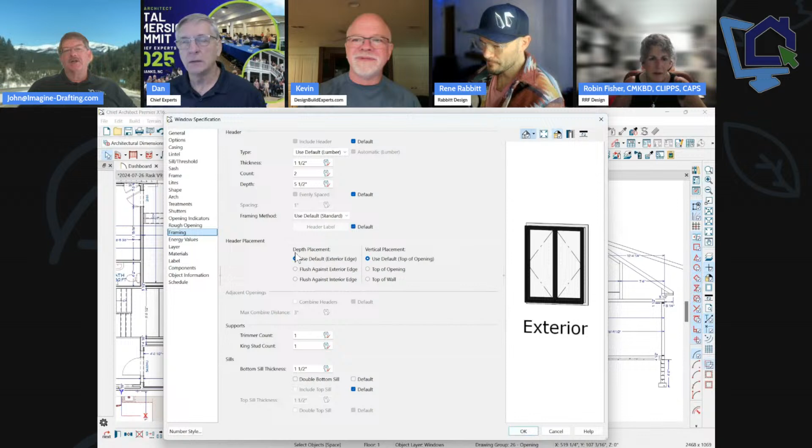So again, click on the window, then open it. No, wait, they're talking about the bottom of the wall, not the sill plate. Well, excuse me.

You'd have to just do a CAD drawing, right? If it were me, I would actually do it manually with a furring wall.

What would be the purpose of that? What's the use case of having that situation? Yeah, that would be a good question. That was Designer X asked that question. Designer X, what's the use case for that?

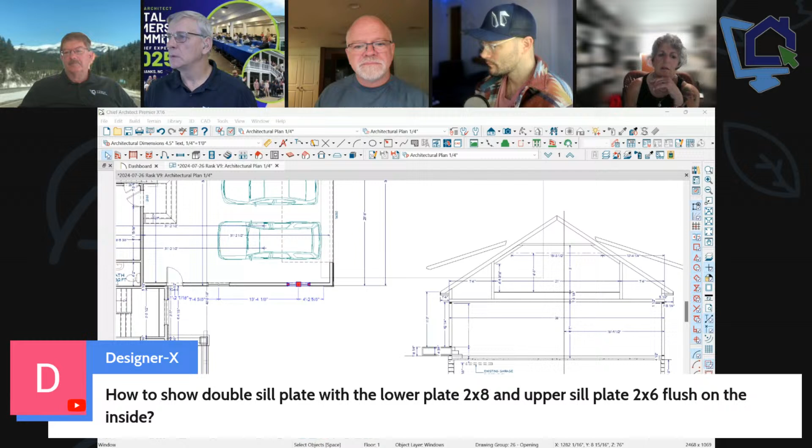Yeah, again, I just handle this with the detail, with a CAD line. You just have to create your wall so that it takes up the space. This is why I only do details for sections, because it burns so much time. When you're doing sections in Chief through a 3D model and you want to show that, you'd have to add that detail to the wall itself.

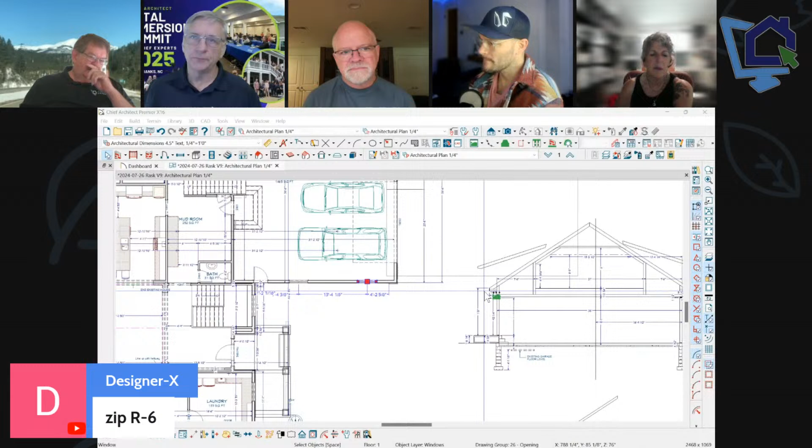Okay, explain to me what zip R6 is. I know R6 has got to be insulation, but what's a zip? That's a zip wall, zip sheathing. What's the R6 for? It's the R-value of our foam. You can buy zip panels now with insulation already attached to them. So a zip panel that is an R6.

He's looking to do a sill plate on the bottom. Well, let me just show you a way to do that, possibly. Could do a pony wall. Yeah, pony wall, that's what I'm thinking.

If you just want to show that in your framing, you just click on a wall, open its dialog, and here's if I wanted to show it in 3D, here's how I would do it, possibly. I'm going to draw a line through here, and I'm going to trim out my studs here. Okay, I'm going to add another plate.

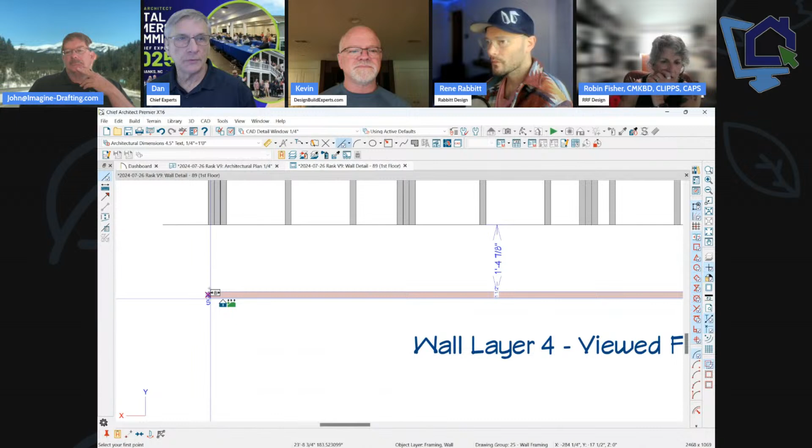Copy. Oops, I missed my snap there. Again, this is the long way around, it's one wall at a time. You could click that bottom wall then and make it a 2x8.

Okay, just by changing it. And then I'm just going to extend my stud, delete that line and extend my studs back down. So it's a way to do it.

It's manual, it's not super easy. I'll set up a way to do this, and I could show it in a little bit if you want to.

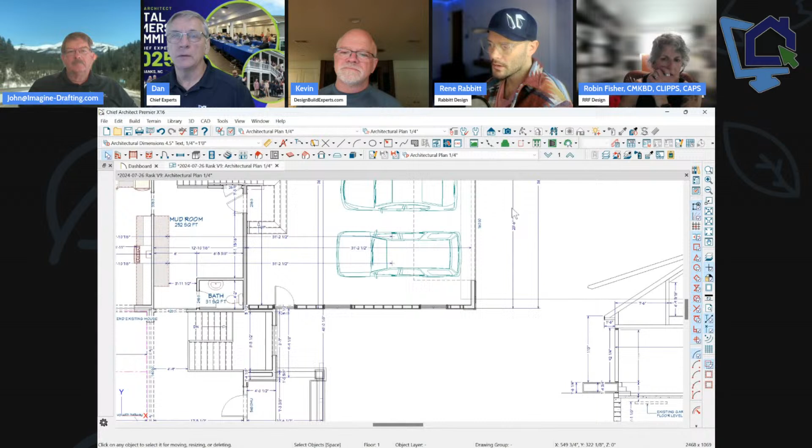But let's see if it worked. Yeah, so there's my plate. My plate's centered on the thing, so I would need to adjust that. I need to do the X, Y one way or the other. Once I calculate that, it wouldn't be hard to do, and I would have to move it over half of the distance of the plate.

I'm assuming you're wanting to do the plate like that because you want your zip panel with the sheathing to rest on the 2x8 and then nail at the bottom here. That's what I'm assuming. His last comment defines that, and that is correct, he wants the zip to sit on that plate. So that would be a way to do it so that it would be part of your cross section when you add that to your sections through your model.

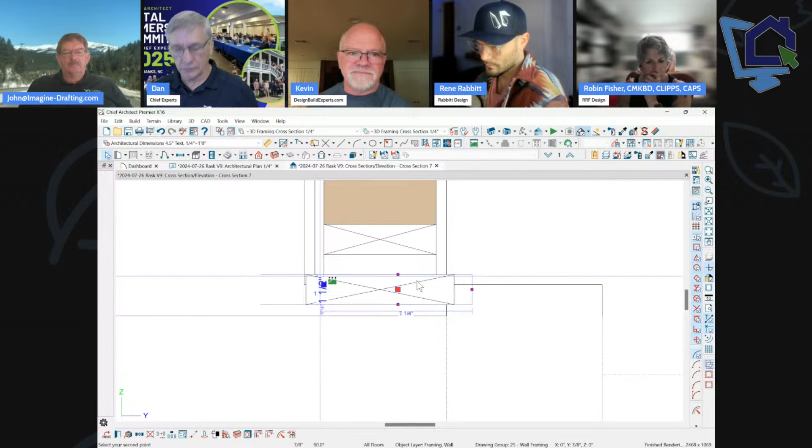So I got it here, right. I could probably move it right here too. The nice thing about... I'll do it the other way, like this. There you go. So now that's going to be sticking on the right side, and your sheathing would rest on top of that.

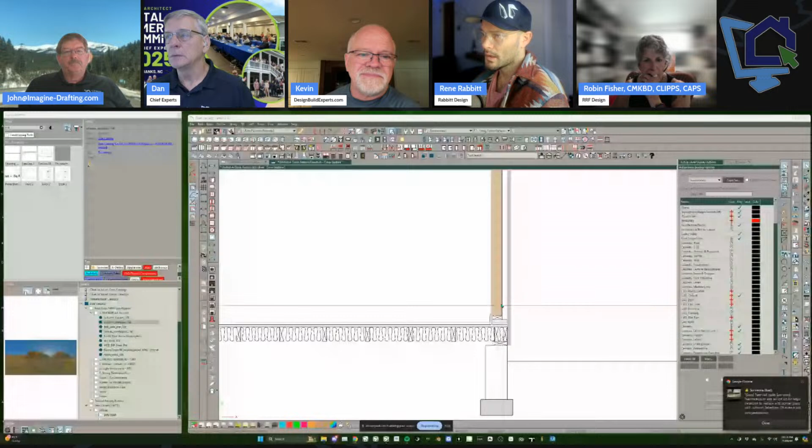Show us what your solution would be. I just have a pony wall here, and you've got to get rid of the little insulation cross box because it's going to show that this is insulated. But the pony wall is only 1.5 inches tall, so all I did was add that 2 inches, assuming 2 inches of zip wall, plus whatever this pony wall is. Now it didn't auto-create a cross box, that might be because I didn't get it right on the money, but the model is actually built this way now.

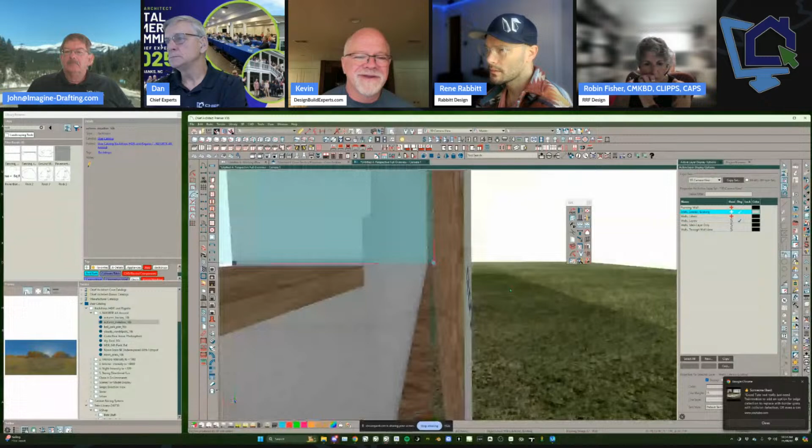There you go, so show a 3D view of what the pony wall looks like. Just show people how you made the pony wall for those that don't know how to do pony walls. So that's over one of these, I'm not sure which one I did it on.

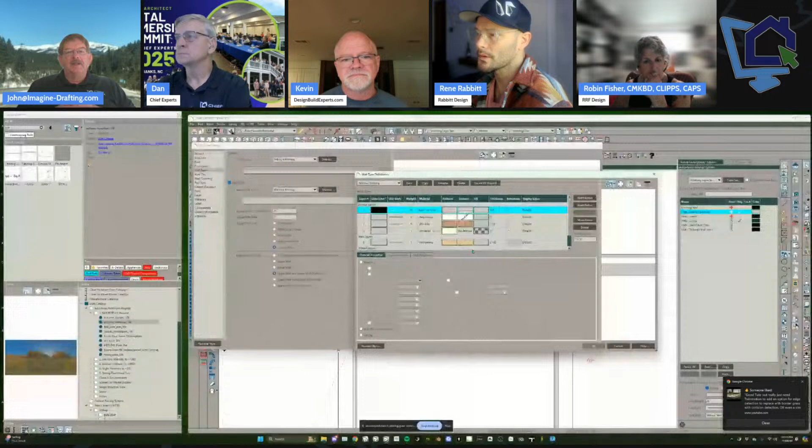So I opened up a wall, and in the wall types panel, designated it as a pony wall, and then went in to define my upper wall. I redefined the upper wall and dropped in a 2-inch insulation air gap. Make that wall a frame, that's the zip wall. And then the wall below it is 2 inches wider, that's the 2x6. So that's a 2x6 wall plus a 2x4 wall on top with that zip sheathing, and they are the same thickness, so they will align.

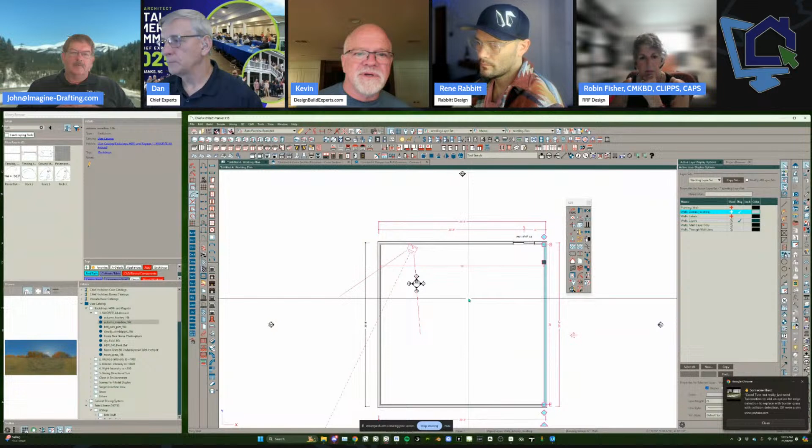So I just made it 1.5 inches tall. I have another way that also makes use of a pony wall, but you could also simply make a pony wall where the bottom part of the wall was only 1.5 inches tall. Make your wall 8 inches wide, make the upper portion of the pony wall 8 inches wide, and the zip is the exterior layer of that. So you've created an 8-inch wide wall with the zip sitting on top of an 8-inch wide wall that is only 1.5 inches tall. That's what I did.

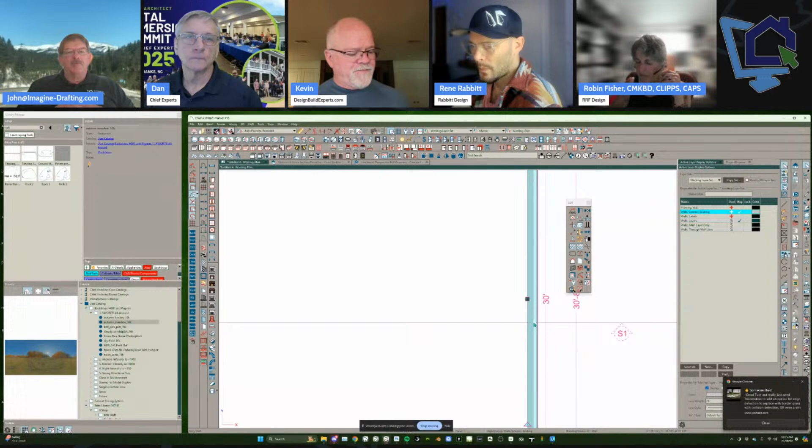Same thing, except that they're all pony walls that way. Now that you have that wall built, Rene, put it in your library and pull it from the library to draw it instead of from the wall tool.

Done. You call it the zip R6 wall. Does that only save the top wall, or does it save the bottom too? So you still have to designate a pony wall? Oh no, you're right, it does come in as the whole thing. Saves the whole thing, saves the whole thing. All right, cool, there you go, look at that.

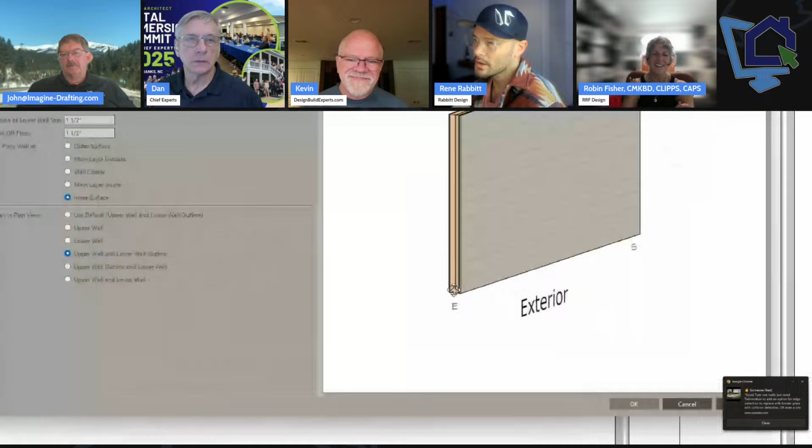You guys are amazing. It even shows it in this little preview, right? That's worth at least... how much is that worth? Man, that's worth a lot. You need to get those tricks at the summit.

I have a question about this zip sheathing, let me show my screen here. So again, these panels are now coming where you can get it with the insulation attached to the zip sheet. The zip sheathing is the coated OSB that's got the air barrier on it already, and then they have different thicknesses of the insulation.

I'd love to know how that compares in cost to put that on versus just, because I have a client that's asking for 2x4 framing with the R6 zip. I understand the benefits of the zip panel, that a lot of times you get through the stud, you'll get thermal bridging and cold transfer, and this breaks that. So I get the benefits of it, I'm just curious how the cost would compare. So if you think about it, can you comment, who's it, Design Build Experts?

That would be a really good breakdown of cost in the Discord server about that. Let me see if I can find it.

I can tell you that from my standpoint, when I was building, the zip was nearly equivalent to the cost when you consider everything, not just the price of the material, because of the labor and effort to put up the air barrier and insulation layers versus just putting up the zip. The place where it really shines is that you can put it up like anything else, seal the joints, and you have a completely sealed exterior, as well as not dealing with the wind blowing and pulling off your air barrier. So when you consider everything, it's easily worth it.

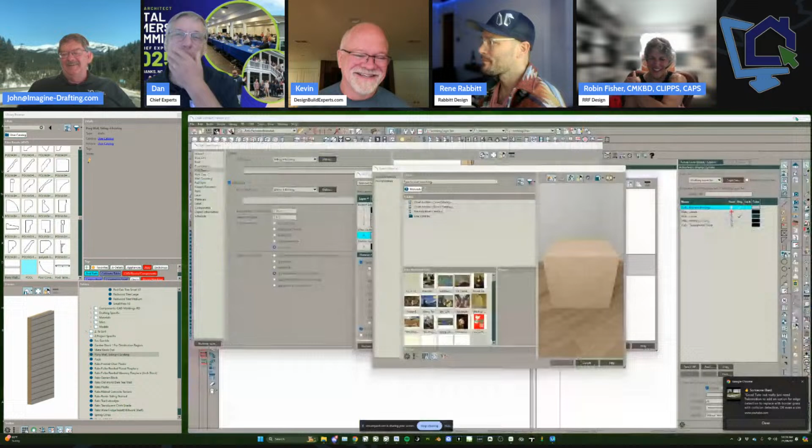This is a compliment and a dig at the same time, I think, Norman. So thank you, Norman. Yes, I agree with you, Norman. I wish we were metric too, much easier. So you've got an advocate here. They won't do much good.

Okay, cool, that was really a cool topic. I like that. I looked up some pricing on those sheets the other day. How much does a sheet cost? That's what I would like to know. I'd have to look at the R6 on it. I found some price like $90 a sheet, something like that.

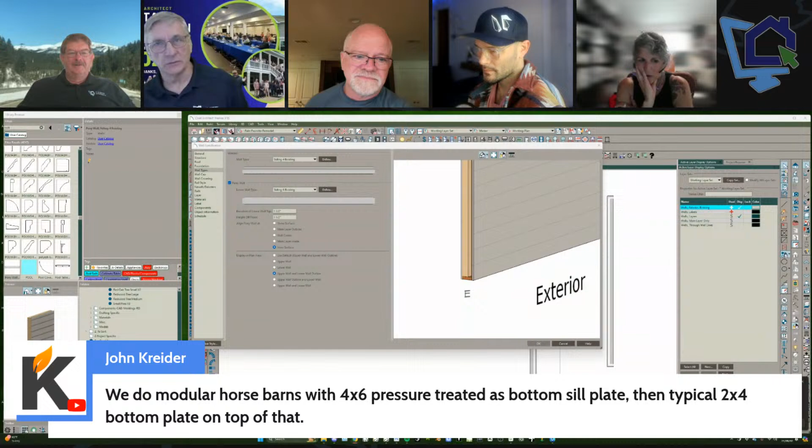Wow, that seemed like a little. But you have to compare that to the sheet of insulation, the sheet of OSB, the sheet of air barrier, everything total. I was comparing it to 2x4 insulation with the zip and the foam versus just 2x6 with OSB, that's kind of how I was looking at it. I understand what you're saying, but then you have the labor of installing each one of those things independently.

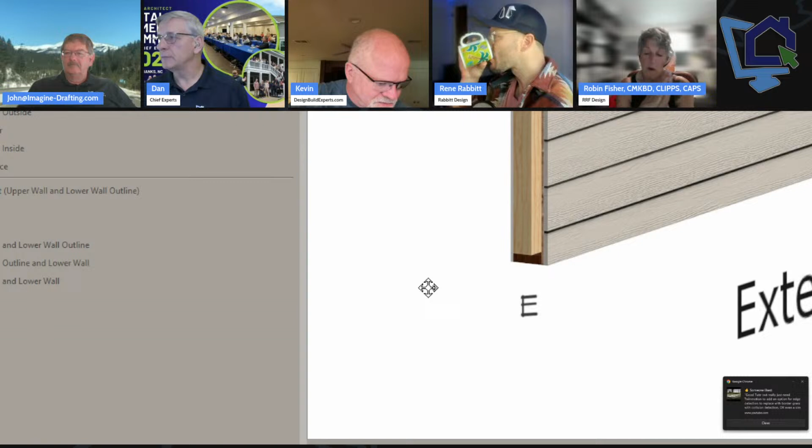Erin makes a really good point, she says that's only one trip around the perimeter with the scaffolding. Right, scaffolding is a nightmare putting up and down, and it takes so much time to do it. So $87, so it's not too far off. Yeah, and to me, once I did it on the first house, it was a no-brainer. From that point on, everything was done that way.

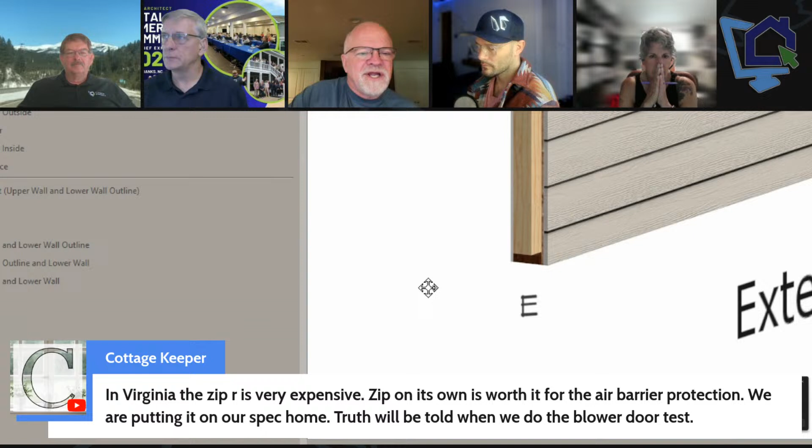So did you do the 2x4 with the R6 zip? No, that didn't exist. I did it with the zip, but I was still doing the insulation on the interior. Now with the new energy codes, it makes complete sense, because we have to build up that exterior R-value to the point that you've got to have a pretty thick wall to make that happen.

Cool, great. Got a question here from Michael Powell in the comments: section arrows are larger on the foundation plan than the floor plan.

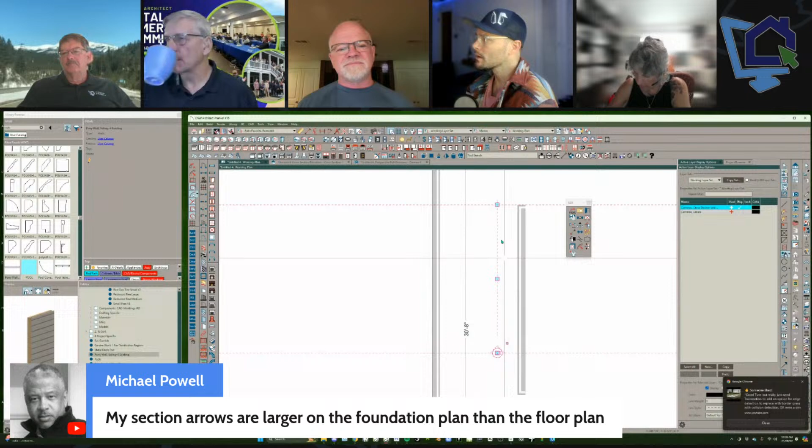My section arrows are larger? Oh, that's going to be from the text style, I would assume, of the cross section. So this guy right here, camera's cross sections, foundation plan, camera's cross sections. It may also have to do with the text style.

You're just repeating me today, huh? Well, I revere you, so it's important. What is it? Imitation is the best form of flattery, right? Just change.

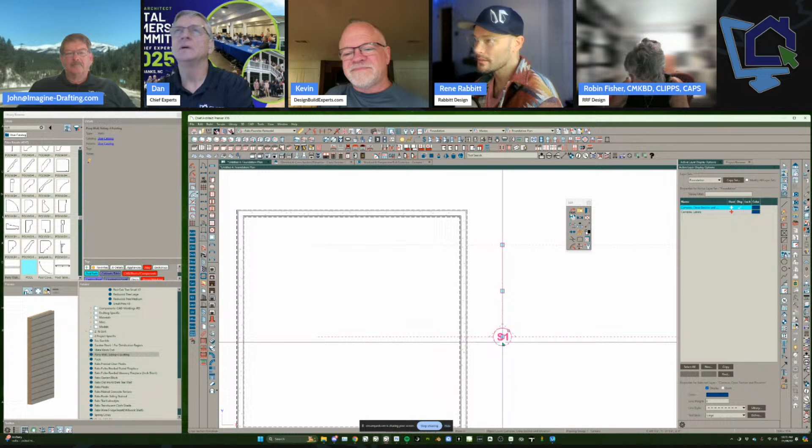So if the cross section, you can override this. First thing to check is if your text style is different on your foundation plan than your whatever other plan view, which is coming from your layer set. That's your layer set designating that. And then the other thing is maybe you overrode the text style for this in the plan display panel, I think.

What else have you got? Margaret's wondering if we finished going over the X16 stuff. No, we haven't, we still have like 15 more to go. At the rate we're going, we could be going the rest of the year. We'll do the X16s till we finish them.

Let me review where we were at with that. We went off on a tangent since Dan and the guys were gone, a really long one. Since I'm the one that does the scheduling, let's review it and then decide what else to do. We dove into rendering, that's all. It was great.

I got a question. Didn't have John there to cut us off. You guys chime in anytime if someone asks questions, but let me throw out a topic here.

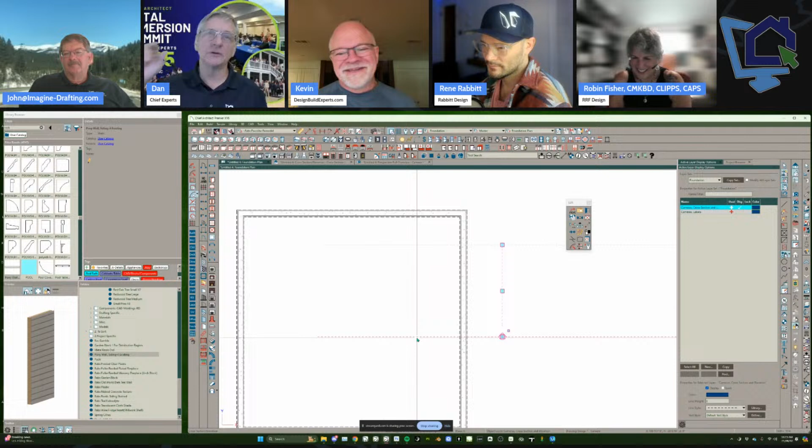How many of you do this sort of stuff before you model your building? Actually draw the cross section before you try to model. It's a lot easier to do that.

I've done it. Can you show my screen, John? I do that when I'm doing remodels because I have to. It's the only way to get your dimensions correct.

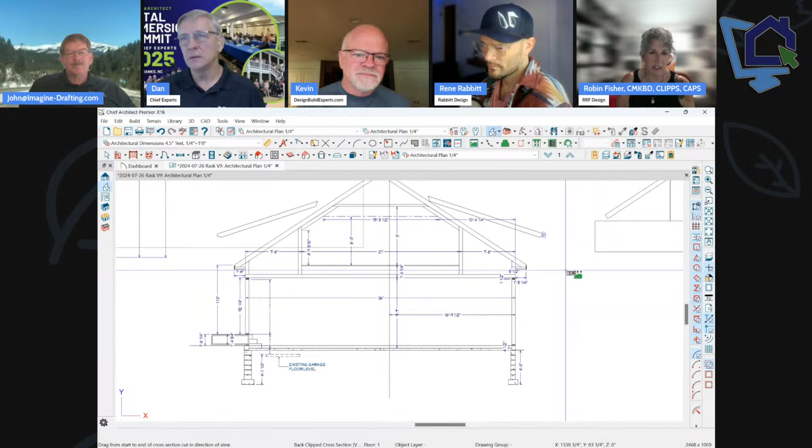How many people on the call listening in do this, where they actually just use the CAD tools and drawing, just drawing a 2D CAD drawing of what it is you want to model? I mean, I do this a lot on a lot of my projects because it's the easiest and best way.

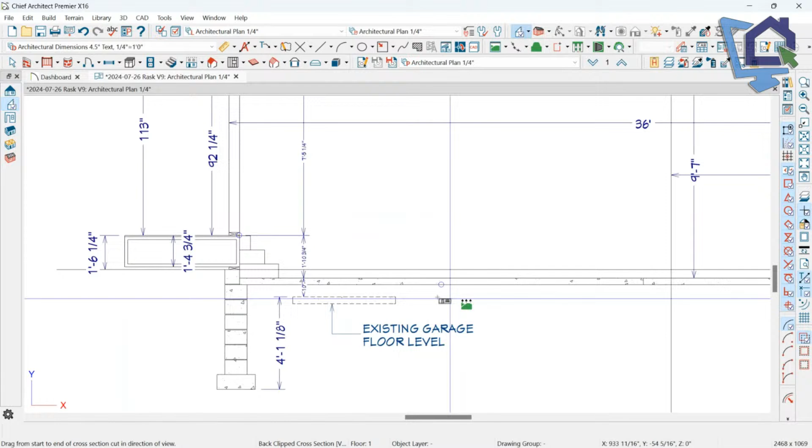Why do you do this? So I know what to model. Okay, so when I do this, here's my zero floor height right here, so I know exactly what to put my floor height at. I know where my stem wall height is at, I know what my ceiling height should be, I know where my fascia height should be for my roof. I know how much headroom - it takes all the guesswork out of messing around with 3D modeling to try to get everything the way you want it.

Why wouldn't you just be plugging that into your floor defaults? Because I don't know what it needs to be to plug in. How do I know I need 1 foot 10 3/4 inches from zero to the top of the concrete? That number would come from my floor joist, my truss thickness, sill plate, coming from the height of the concrete block or the foundation walls.

Are we talking new construction or remodel? This is new construction - they're basically removing the old house. So you're mapping it out essentially. Yeah, pretty much. You're not doing it for the whole house, you're doing it to get the critical measurements.

Yeah, and once I get all my critical dimensions in place, I will then pull my cross sections through my model, because I can add the framing to this model super easy and done. I don't know, it just really works for me. I've done this for years, always when I'm trying to do a remodel.

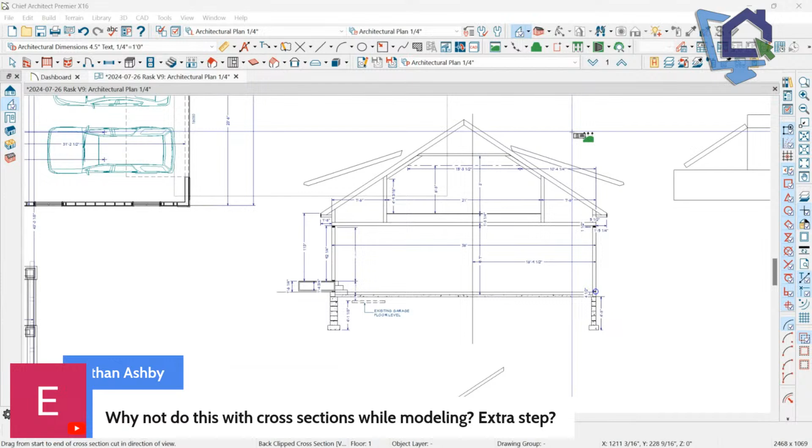I'm with Ethan on this - why not just model it? Because I also don't know what to model. How do I know that this height here needs to be what it needs to be when I need 113 inches? Or how do I know that my fascia height is such?

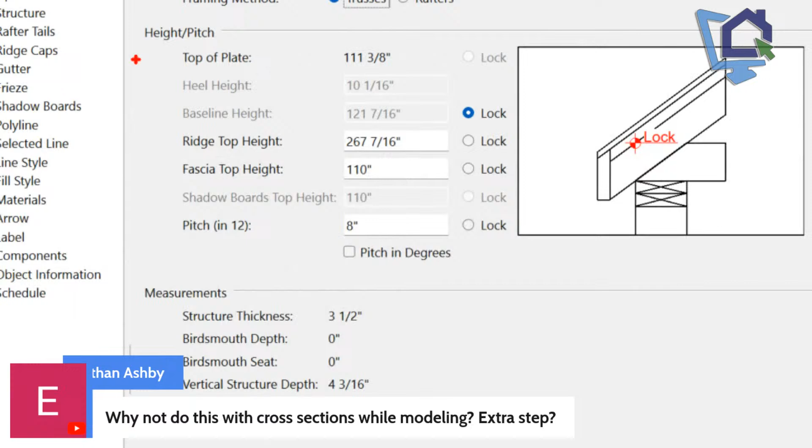Although I will say one thing they added in X16 which is fabulous, is this one setting in the roof dialog that tells you your heel height. This is so freaking cool. This was part of a thread on Chief Talk that was like a brute force thread.

Like, give us this or we quit.

When I noticed that in X16, I almost jumped up and down in my chair, because that's such a valuable piece of information. I would always have to draw my cross section to figure out my fascia height when I needed a specific heel height. Now it's right there, which eliminates a lot of that guesswork and drawing. I just thought I'd throw this topic out there because it's something I've done for a long time, and it really works for me.

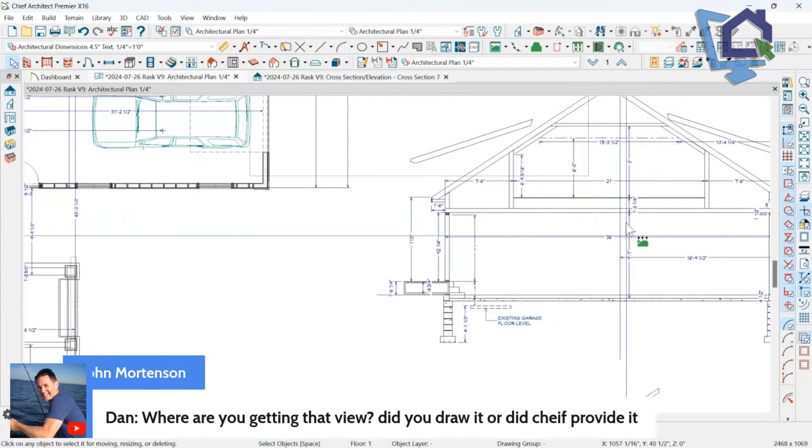So John, this is a CAD detail that Dan drew that he's showing there. As I'm drawing this project, I'm doing this, and the other reason I'm doing this is because this is like the 4th time now that we've changed the garage and how they want to do it.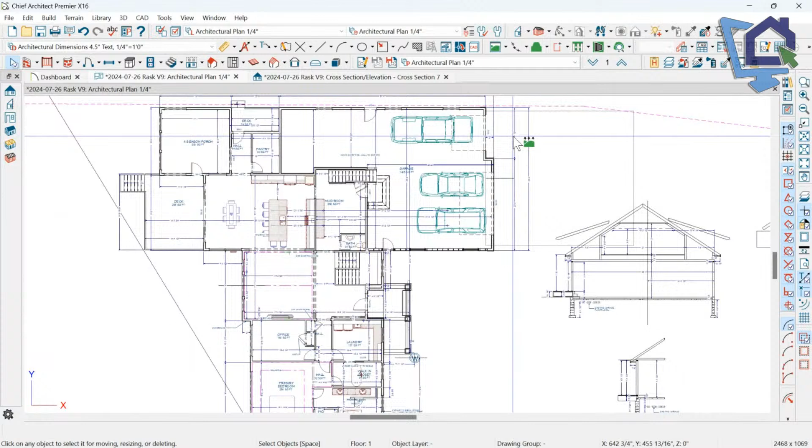Yes, they want living above. No, they want bonus above. No, they don't—now they want to make a bigger dormer off the edge to do bedrooms up there. So it's just part of the whole process of working your plan through. I'm up to version 9 in this particular layout for this project.

Interesting project too, because these people bought this house on a beautiful lot on a little lake here in the Twin Cities, and their house is about like this right now. This is existing, this is going to be new. They're going to live in this while I build this, and then they're going to live in this while they tear this down and build this.

I'm designing around a critical wall element here. But regardless of that, it's a fun project to design. We're just taking our time and getting it the way they want it. So it's kind of fun.

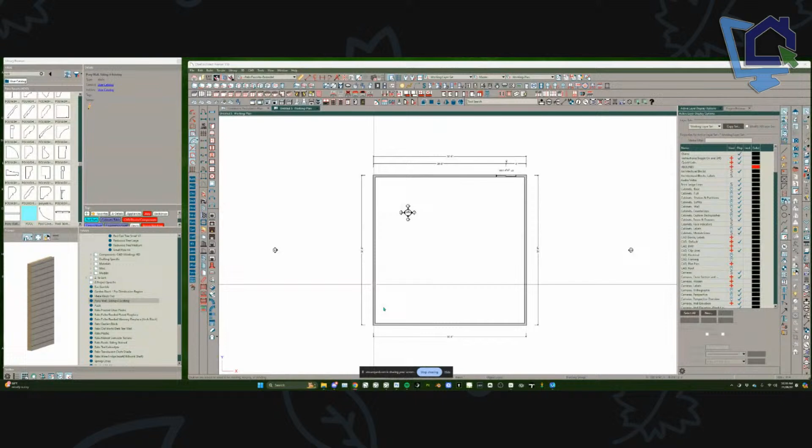Can I redress this? Let's see. Please, I want to put my screen up—I'm just curious in people's opinions. So here's what we're getting, and we could stick our faces back on the screen if we want. To me, I think I'm maybe a little unique in that I do a lot of work in 3D.

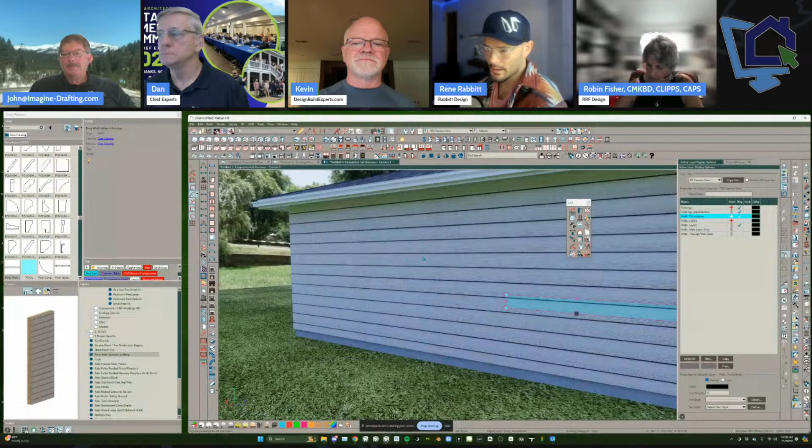So maybe that's why this works really well for me—you had 1 foot 4.5. I already know I have 4 walls in here for a number of different reasons. This is my template plan. It just comes with 4 walls established, which is establishing a building. So I know off the bat that this is here.

And part of that is that when I'm coming into a project and I need to build a garage—let's just say I'm going to turn this room into a garage, because that's what you were showing, is that you were showing a garage, right?

I already know that this is a 1 foot 9 setup, so I can come into this room and bring this up 5 inches. That's my first part, which turns off auto build foundation. Next part is you had a different heel height, so I'm just going to come into build roof and change that heel height.

This is very fast to me versus CAD, which seems a lot slower. So that's why I'm wondering what the difference is. I think it's just that I see it differently—I can see this versus it's very clear. Your diagram's super clear and it's a great reference point, right? Yeah, but I might just save this by itself as my reference point.

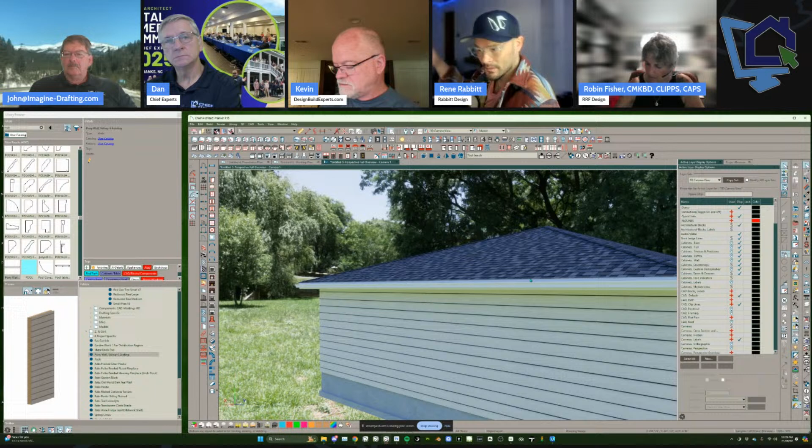It's like, hey, if nothing else, come back to this. I'd say probably about 50% of the types of projects I do have a lot of things going on—excuse my term there—so it's easier for me to organize my thought process if I put it on the screen and have it right there.

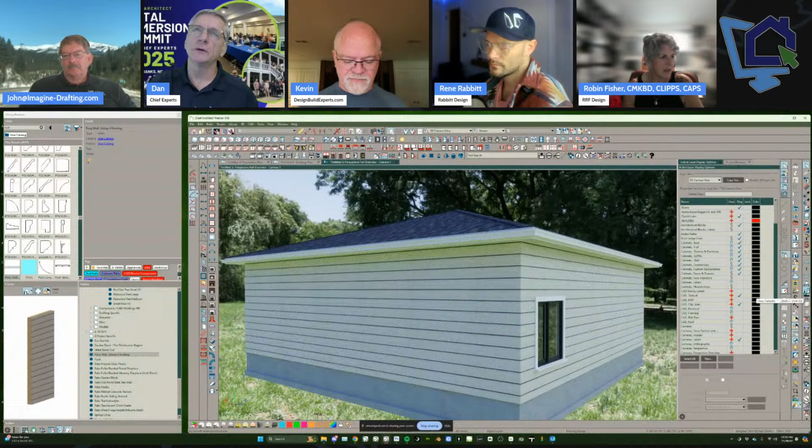Gotcha, totally understand. And I think reverting back to a conversation we were having earlier about the young lady that's struggling in your class because she can't stay focused—sometimes I think some of that not being able to stay focused comes from a total lack of understanding of what to draw, not how to draw it, but what to draw. Right, right, and I run into that too—I don't necessarily know what to draw.

So if I take a little time and slow down and do what I do with these cross-section things, it helps me clarify what I need to draw.

Let's talk about the issue - there's a lot of really advanced builders on this call and in this room, and then there are people who are not really advanced. Like I'm not a builder, right? I don't do house construction, so it's easier for me to go through the exercise you talk about, Dan, so I can actually understand what I'm creating. Because I'm not really experienced in that. Some of these people on the call and you guys in the room are really experienced, and it's easy for you, especially Rene.

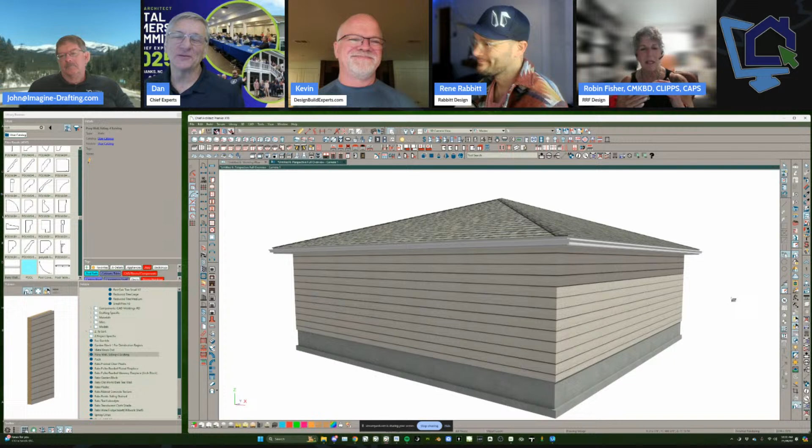I mean, your brain works differently than the rest of us. We all know that. I say that lovingly, but yes, his brain works at a higher level. He vibrates at a higher level than the rest of us. We already know this about Rene. But you haven't seen my outtake videos. No, I haven't. But you did actually admit that you were human recently, so that was good to know. Yeah, when I was choking on a recording.

So sometimes doing a rough drawing is really good for people to do, and I really recommend it, especially for beginners, to sketch it out if you don't quite understand what's going to happen. Some people don't understand once you put it in 3D or get in the plan - you're like, I have no clue what I just drew, right? So I want to show a couple things real quick because I was kind of in that mode.

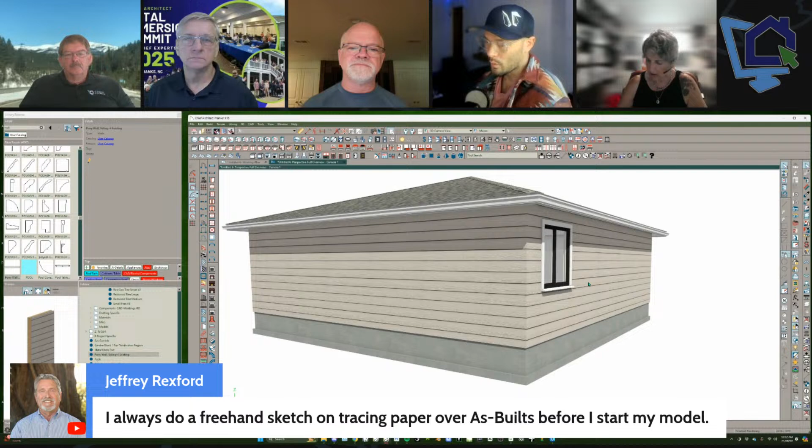Floor defaults - if people are a little newer to this software, floor defaults drive all of your structural setups for every room on the entire floor. So instead of designating individual room structure and heights, I'd encourage you to change your floor defaults, and it will automatically change the heights of all the rooms on that floor. So if I have a floor where one room is 9-foot ceilings and the rest are 8-foot ceilings, you should go to floor defaults, make sure floor defaults are 8-foot ceilings, and then just change the one room to that 9-foot ceiling.

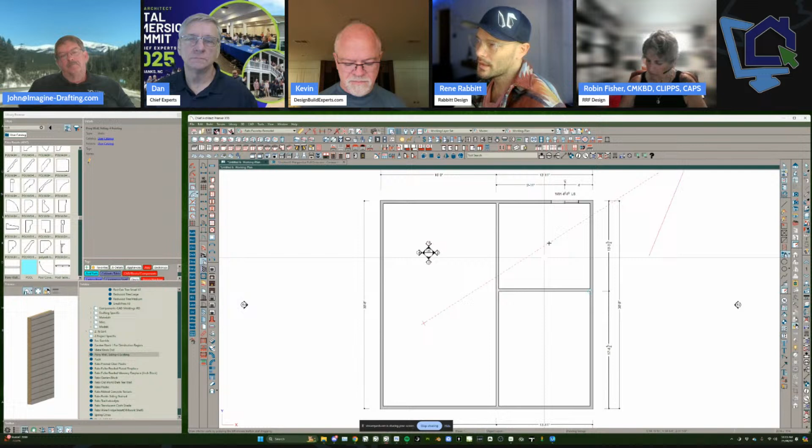And I do want to show, if you want to try working in 3D, I'll show you a workflow for this. I've created a dividing room where we'll do a couple dividing rooms - these two rooms are going to be 8-foot ceilings, and this room 9-foot ceilings. Actually, let's do the inverse: these two are going to be 9 foot, and this one's going to be 8 foot.

So I want my floor default to be 9 feet. I know my template plan has an 8-foot ceiling. So I get into edit default settings, floors and rooms, and it shows me floor levels, and here's my first floor defaults. This dialog looks a lot like the structure panel on a room dialog box - it's the same panel. And here's where I can just hit plus 12, and that will get me my 9-foot ceiling.

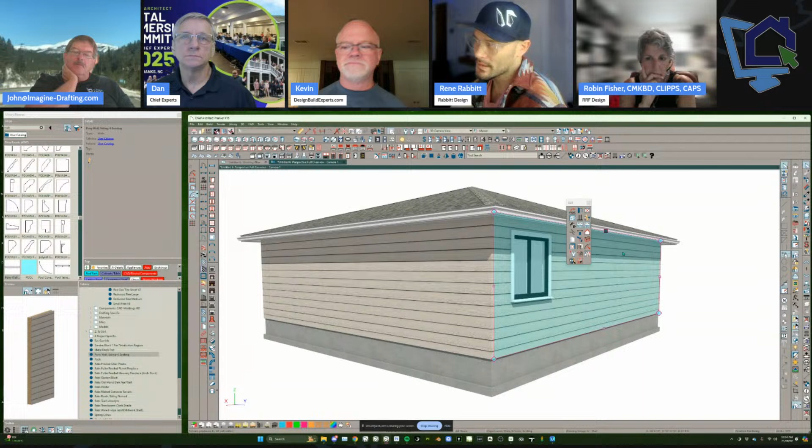Instead of this, I'm going to show you another way in 3D. I can click on this - this selects the wall. If I hit tab or enter, it now selects what's called the exterior room. It's going to give you this edit handle here, and down at the bottom somewhere it should give you another edit handle, which is that - oh, excuse me.

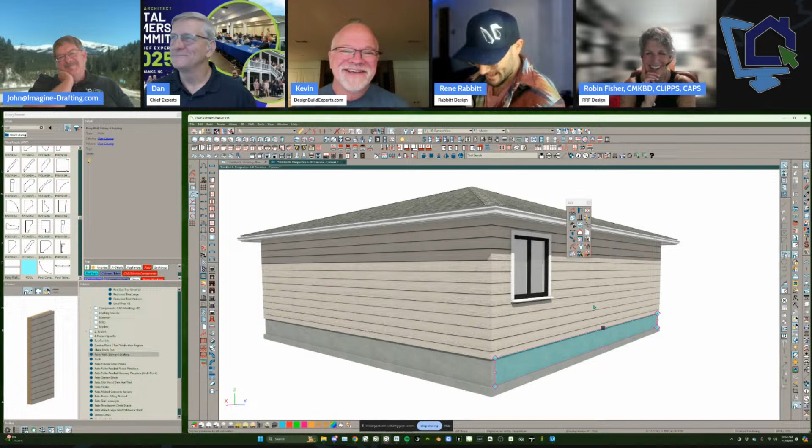That's just for the floor below. There's a spider right in front of my screen. It's going to land right on my keyboard. So if I tab through this and grab this - oh, he's going back up. Okay, you didn't think about taking him outside, huh?

If I tab through this and drag this edit handle up, you're going to notice the entire structure looks like it's moving up. It is changing the floor default. So very quickly, while I'm dragging this cursor up, I can hit tab or enter and put in 12 inches.

I've now changed the entire floor default for this floor to 9 feet. Do you have the ability to hold the roof in place at the same time? It's just auto building off of that new plate height. So there we go, now I've got a new 9-foot ceiling plate height.

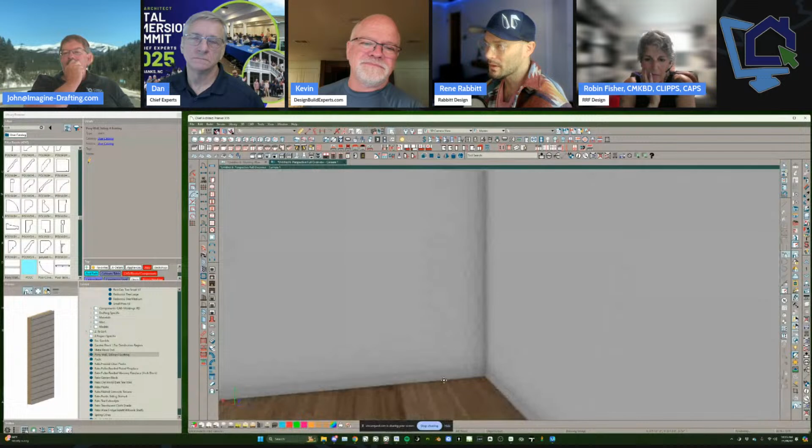And then I can go into that one particular room that I wanted different, and do the same thing. I could come into this room, tab into it, drag it down 12 inches, and now that particular room has an 8-foot ceiling height. The rest have 9 foot.

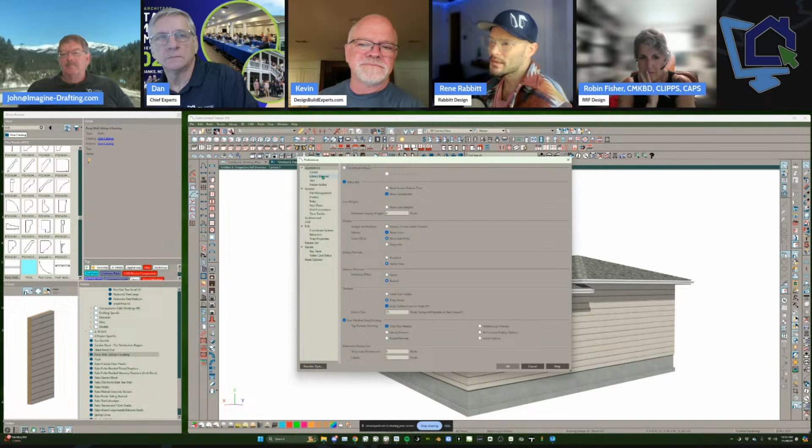Note that he wasn't changing a wall, it was the room. So you have to make sure you can see that box all the way around. Exactly, because you don't want to mess with the wall. By default, in your preferences, let's see, where is it?

Architectural - by default, select room before wall in 3D is unchecked. That used to always come in checked, and if you would change the ceiling height, or if you tried to pull a wall up, it would change the ceiling height in your plan. Did they change that as a default view?

I don't think I've been changing that anymore, because every time I would reset my preferences for a new version, I would go change that one right away. So I think they've changed that now, to where it's unchecked by default. I think there was a few versions where it was always checked in, and people were getting confused because they thought they were pulling a wall up or down, and you changed the whole room.

I'm going to show one more thing here. In that structure panel in this room, notice that the wrench icon doesn't have this little check mark next to it. That's indicating that we're no longer following the floor default. If you didn't know, this is good information, that's huge to know.

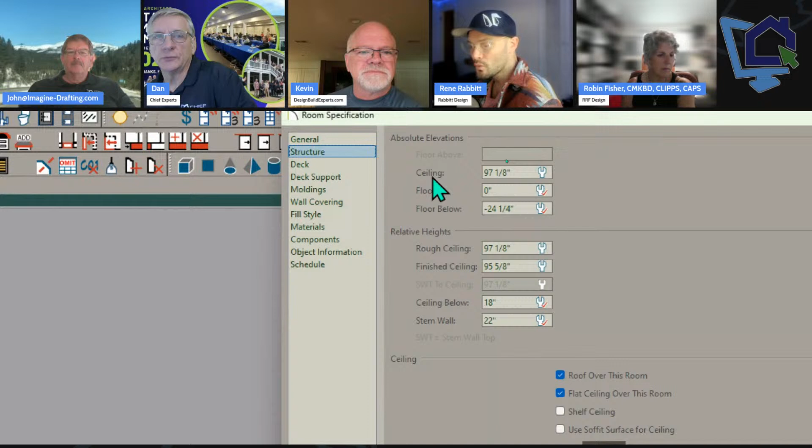If you wanted to, you could select multiple rooms, hover over and just click this wrench icon, and it will put a check mark next to it, changing your ceiling height back to the floor default. That's really nice information to know, why those wrench icons are there and why the little check mark is there. I don't think a lot of people understand that, but yeah, if it's checked in, that is the default setting for that particular item.

It's also a good way to fix multiple rooms where you know you've got an issue with ceiling heights, and you just want to make sure - why is it off? Rene, can you bring that thing back up you just had open and change one of the rooms? Add a few more rooms, and then change the height in one of the rooms.

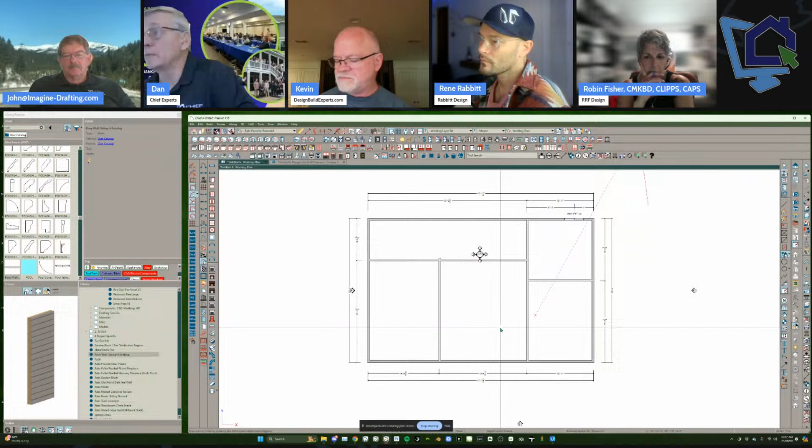Use that little multi-select thing, John, that you like all the time - match properties. Show people how to use the match properties real quick. That's really a nice way - if you've got a lot of stuff going on in your plan and you want to check all your floor and ceiling heights, or just your floor heights, or whatever, the match properties function is amazing. Especially if you have like 3 rooms that are one height and 3 rooms that are a different height.

So I have 2 rooms that are not. Let's just put some labels on these things - actually, we'll put labels on all of them so my labels show up. So there we go, I've got a couple rooms that have 9 foot, a couple rooms that have 8 foot.

If I select this one with 9 foot - hold on, now if this doesn't get people asking a question, how'd you do that, I'll be really surprised. That's in my template. Yes, it takes a little macro for that.

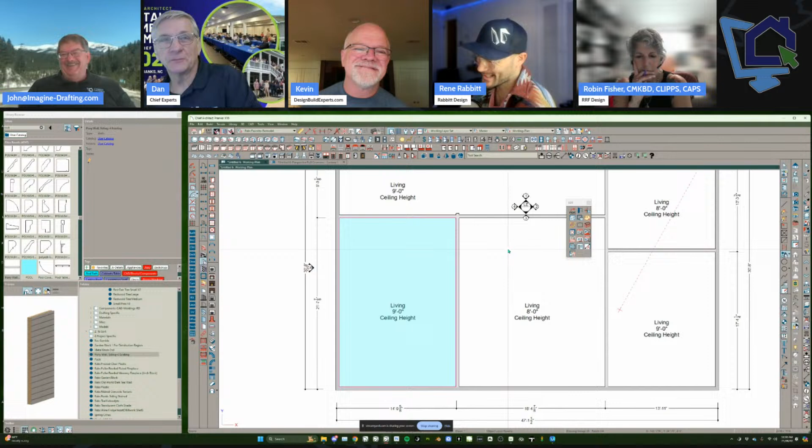Then I'm going to use the match properties tool. That was this guy right here, the little guy, the little yellow dot icon. And then I can just type in a search. There's a couple clever things that Chief does - you could just click on select found, and that will select anything that was found in your search term.

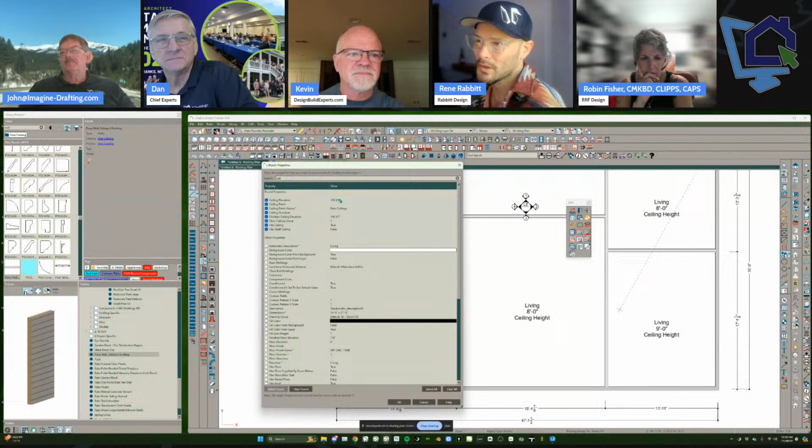So in this case, I'm looking for anything that has the ceiling elevation. Press OK, and now Chief highlights with the color you have for selected objects, highlighting rooms that are matching that property.

The next thing you could do is use the apply properties tool, and this will apply those properties I searched for. I just hover over these rooms, click, and okay, now I see it applied it to this room. Now it's a 9-foot ceiling height.

I still have that tool enabled, you can see my mouse cursor's changed, right? So same thing, I could draw a marquee over here, or just click in the room.

It doesn't have any kind of visual indicator that you're doing anything with that click. In fact, it's hard to click in small rooms sometimes, and you really have to zoom in on those rooms.

Sometimes you'll click in it and it will make the change but won't change the color. If you keep clicking and nothing's happening, just go back out and do the match properties again, and if it took it, it'll show it matched. Another way to think of those buttons is one is copy and one is paste, so you always have to click the paste button, the apply properties.

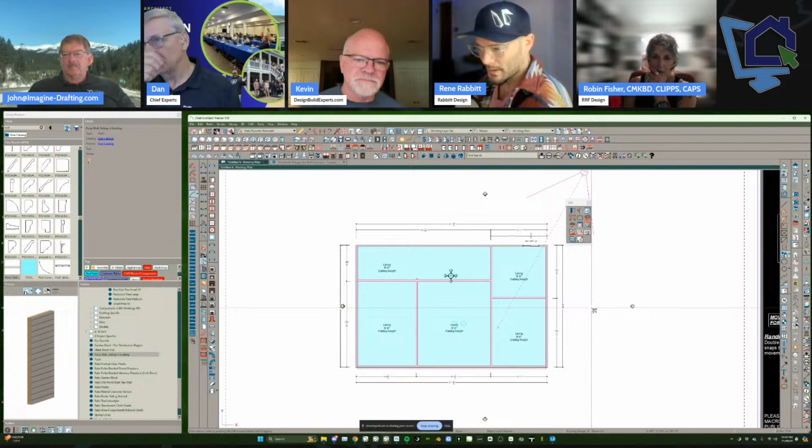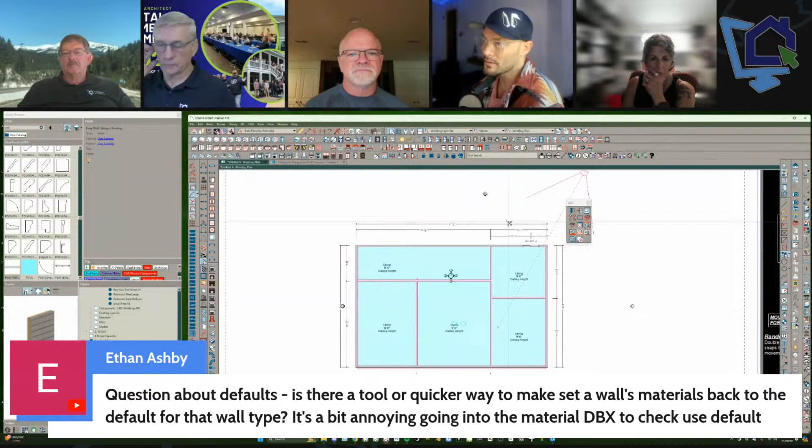Another thing I don't think people use that often, and now that I'm used to it I use it all the time, is I think it's the escape button, but mine's remapped, where you can cycle back through the previous tools you used. So if you see my cursor, I cycle back through - oops, now I'm stuck in zoom mode - cycling back through old tools and forward through tools I use.

So if I just need to drop a cabinet in real quick, I'm on my wall tool right now. I need to drop a cabinet in, and then I want to be back on my wall tool, I can cycle back to that. You see it just got enabled - I didn't need to hit any other hotkey, I just needed to hit that cycle back and forth.

I don't remember which way it is, but I think by default it's the space bar and the escape. One of them will shut everything down completely, the other one takes you back a step.

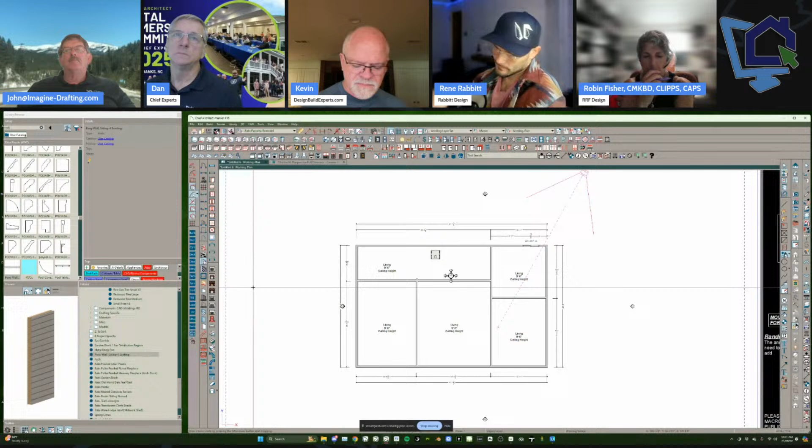I don't remember which way it is. You changed your escape to do that, right, Rene? Is that what you're saying? You changed your escape button to do that? My middle mouse has a left and right click, so I click left, I click right, that gets me it.

So check out Ethan's question, he has a question about defaults. I could do this one, I know how to do this now - took me a while to figure this one out and remember it. Show my screen.

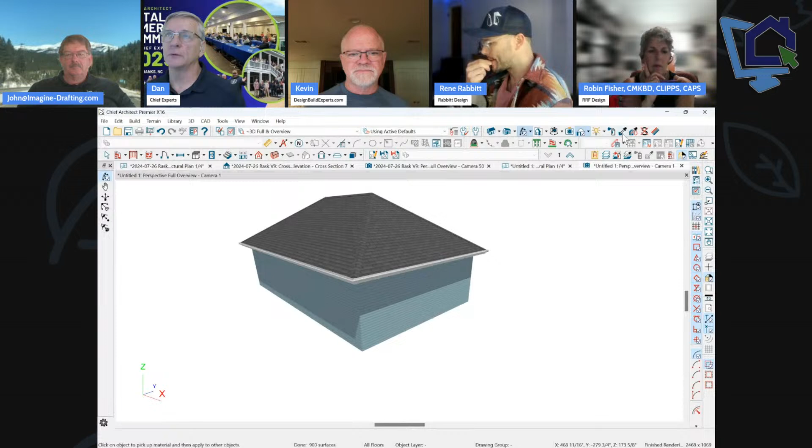So often people use the little painter icon here and paint different materials on their walls, basically skim coating your wall with a different material. And Ethan wants to know, how do I set all my walls back to the default materials?

So what you're going to end up using is that same spray can tool. Now I have to remember if I remember this. I need to get my little icon-y things down here. I want to select all materials - no, this isn't right. I've got to - I thought I remembered this one. Just go to plan materials, and choose default, use default.

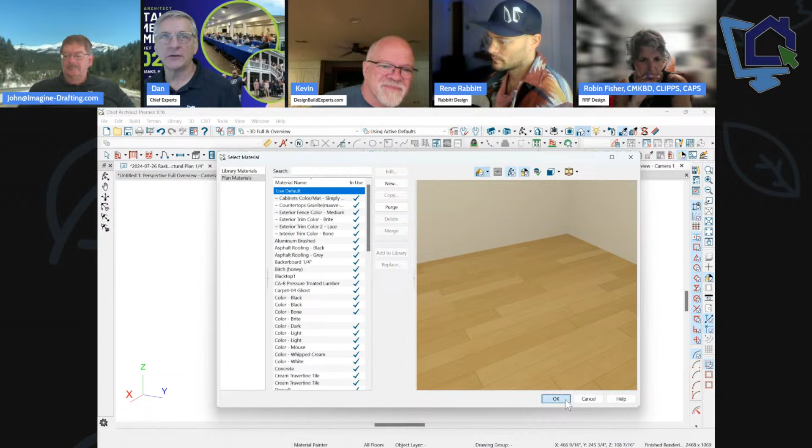So I'm hitting the spray can, and I want to use default material on my walls. I'm going to spray default over my whole plan by selecting the whole plan, so every wall that used to have a material sprayed over it is now set back to the default.

Show that again, please. So you've gone through your plan, made a bunch of changes. You see all my walls now changed because I still had the whole plan thing checked.

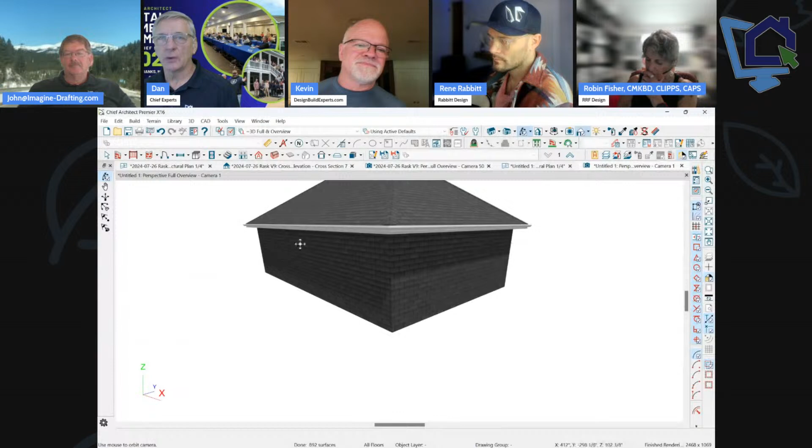So I want to set my walls back to their default material. The default material is what you set up when you go to wall types, hit define, and everything listed there is your default material, not the stuff you've sprayed on top of it. See the word default here? That's default layers now, another nice feature they added in X16, which I love. So I want to set it back so it has the siding again, because if I change the wall type, it's still going to be shingles. No matter what, I could change it to brick, it's still going to be shingles.

So hit the spray can, select default, use default, click OK, select plan, and then just click on the walls, and it'll put the default material back on the walls.

Just for anyone that's watching this, that use default setting works on everything. You don't have to change tools and go back to change other things. If you wanted to revert your roofing back to default, your fascia back to default, it will do all of that, as long as you're clicking on things.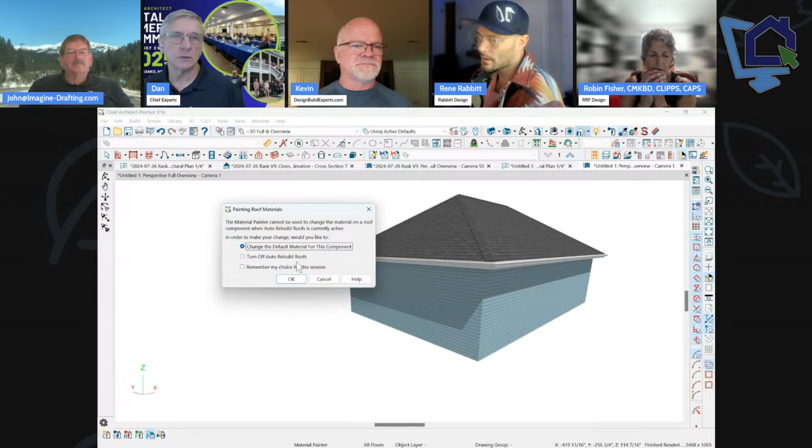Turn off auto rebuild roofs. Oh, this is new. So I'm just going to put siding on the roof, change the default material for this component, turn off auto rebuild. Got it. All right, so I did all my roofs again, but I want to set those back to the default.

And change the same color on your walls too, just so we can show that it'll do both in one action.

Okay, so I'll paint my walls white. Oops, I painted everything because it all had the same material. Let me undo a couple times. That's fine, that's all you needed to do, because I had all the same materials and everything.

So let me just do this again. I'm going to put shingles on my walls, and I'll just do it by object. Okay, and I'll put some white on my roof. Turn off auto rebuild. Okay, so now I want to set everything back to the default.

So I'm going to click the spray can, hit use default, click OK, check my entire plan, click on the plan, click on the roof. Now I'm back to my default materials. Wow, yeah, so that's really a nice feature.

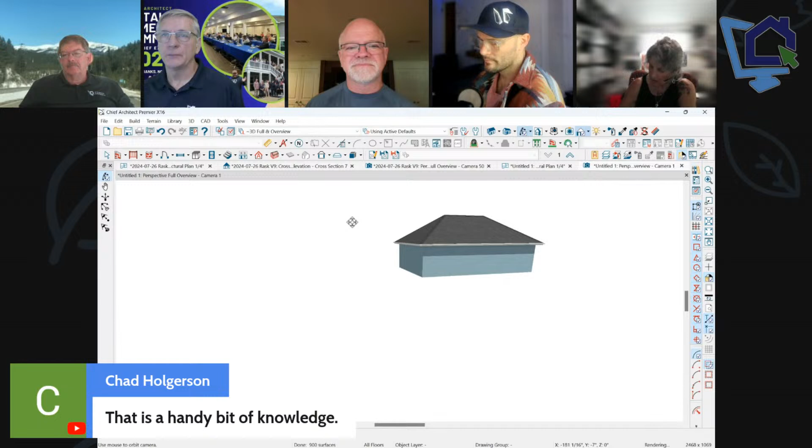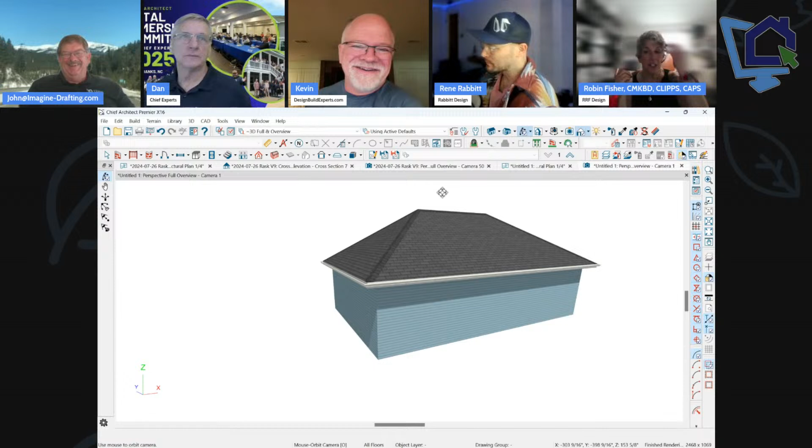It's so simple, every time I do it, it's like, what did I do again? But the key is you have to use the spray can. I'm trying to remember, Dan, wasn't it two years ago you came back from Coeur d'Alene with that tip? Yeah, because I asked him that down there, and he showed me, and it made perfect sense. Dan, you were trying to show me how to do that on a project I was working on, and thank you, now I know how to do it. So thank you.

I want to show something on that, using default materials. If you are bringing anything in from like SketchUp or something like that, you're pulling a model from somewhere else and you're going to end up adding it to your library. So I've got a hood here, and by the way, I just redid all of my hoods in my catalog to use emitters.

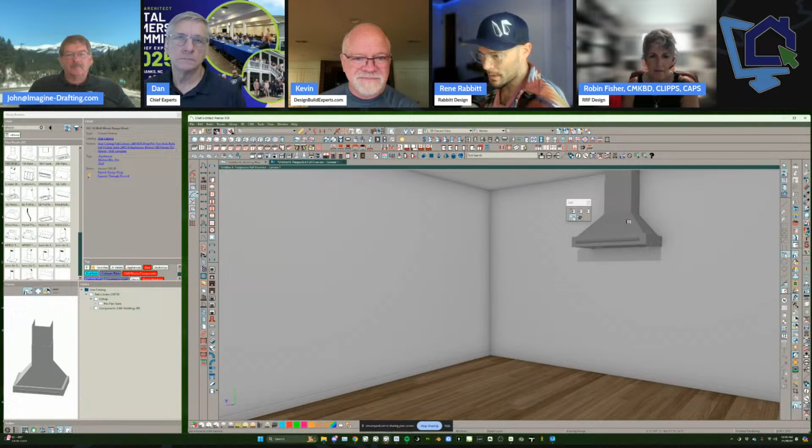Now that they use emitters, we have... what's an emitter? It is a class of material that produces light in Chief Architect. In X15 and before, all that did was indicate that there was light there by creating a bloom effect. Now in X16, if something is painted with an emitter class, it will actually produce light. This is a hood, the hood is a fixture class.

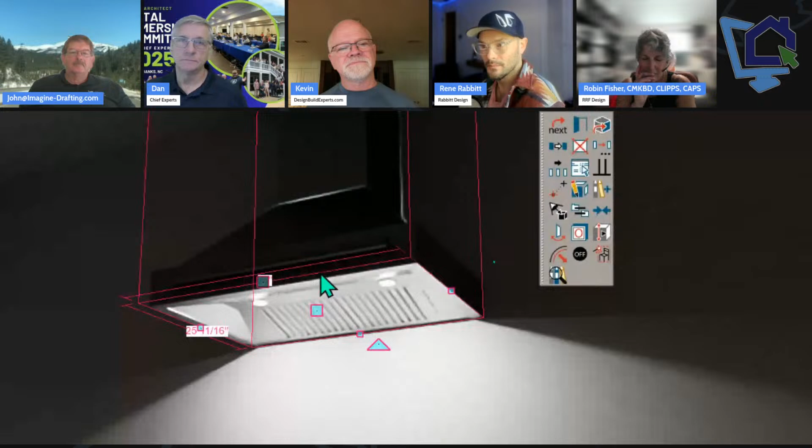It's not an electrical class like your lighting would be, but it still has the on/off button, and that's nice because I used an emitter on the actual symbol itself. So now this does emit light.

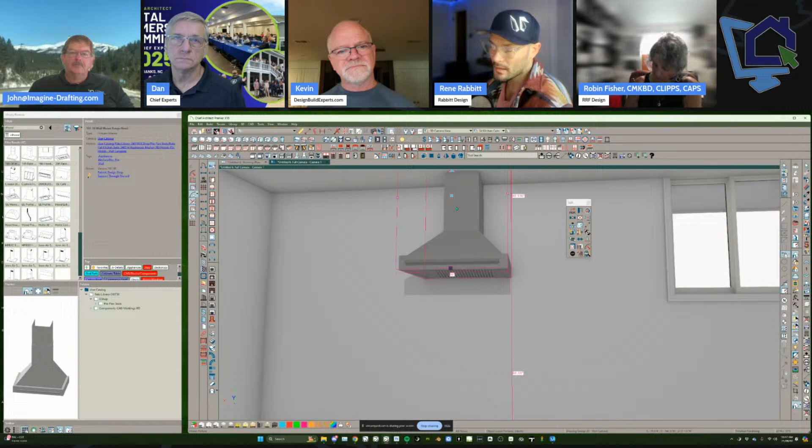Part of building this for my catalog is I want to set this up so that when I drag a hood into my plan, it's using the default material for appliances. That way it's not a static color. If my plan's default for appliances were white and I drag this in, it's going to be white when I bring it into the plan file.

I actually don't know where you set up default plans. I bet it's in 3D material, plan materials. Somewhere in here... oh, it's got to be in default settings and materials. So there we go, default settings, materials.

If I come in here and say for appliances I want this default material to be... just pick something kind of like, how about carpet, shingles? There we go. So carpet is now my default for appliance materials. Look at that, it's going to change this hood when I bring it in from my library. Any hood I've established to use my default material for appliances is now going to be a carpeted hood.

Wow, that's going to carry the fish smell for a while. It's going to be lovely. It'd go perfect with the shag carpet you'll put in the room, right?

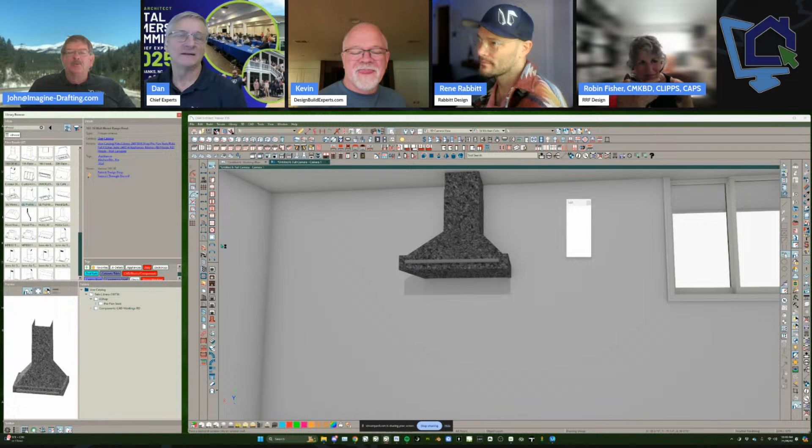You have to draw it in, I'm sure. I was wondering if we'd have to open it up. You can't create a wall with blocking automatically in it? No. Let's see if we got any. No, okay. Ethan, can you create a wall with blocking in it?

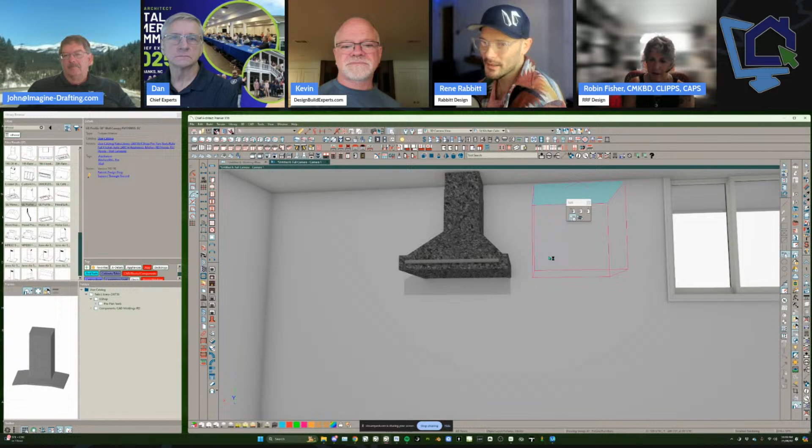No, he's spent so many hours. He's got a project right now where he's modeling modular homes where everything has to be dialed in and perfect, and he's spent a ton of time trying to develop around that. I think he's got a few tricks.

What's he saying there, on blocking? Let's see, there are some things that Chief needs to fix and add. Chief has a default setting for adding staggered blocking automatically in a wall, but it doesn't do it.

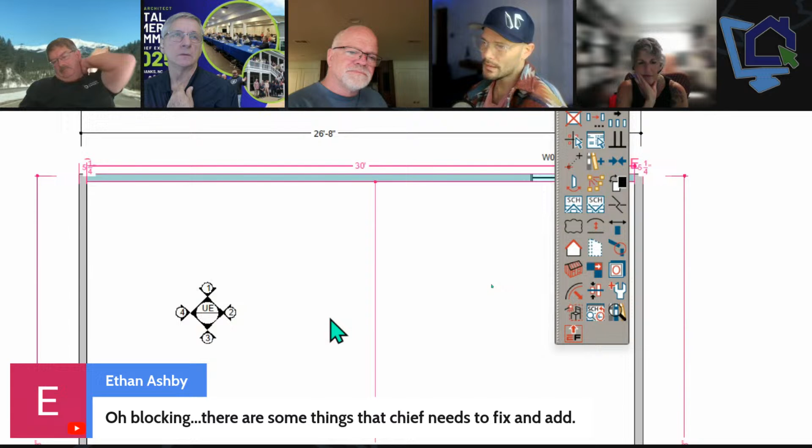That's just making it so the blocking is not in a row, it's staggered, but you're not going to get two rows of blocks for sure. Exactly, I was just trying to get one to start out here. So you can select one wall, build the framing for that wall, and that's going to ask you to turn on things in that view, then you can open the wall detail for that wall. Use a blocking tool from the framing library and just draw through a couple rows of blocks, but not automatically — you'd have to do that on every wall.

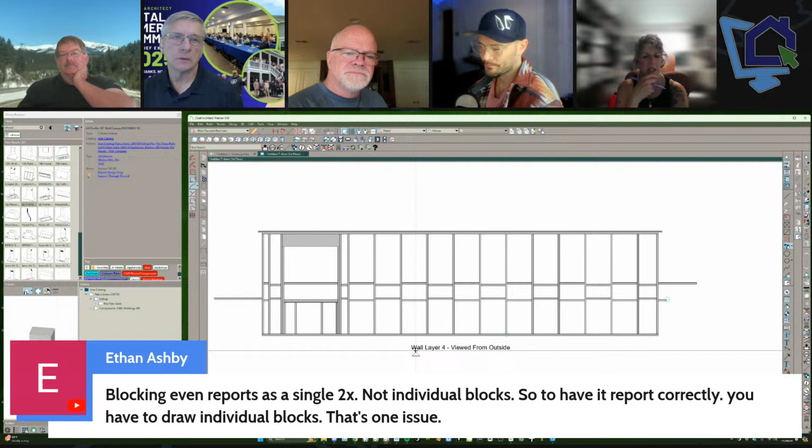And that's staggered, right? Yeah. Can you change it from being staggered, can it go straight across? Yeah, I think that's in my settings somewhere, but you could just open these up and the dialog box for that should show it somewhere here. Inline blocking — there you got it.

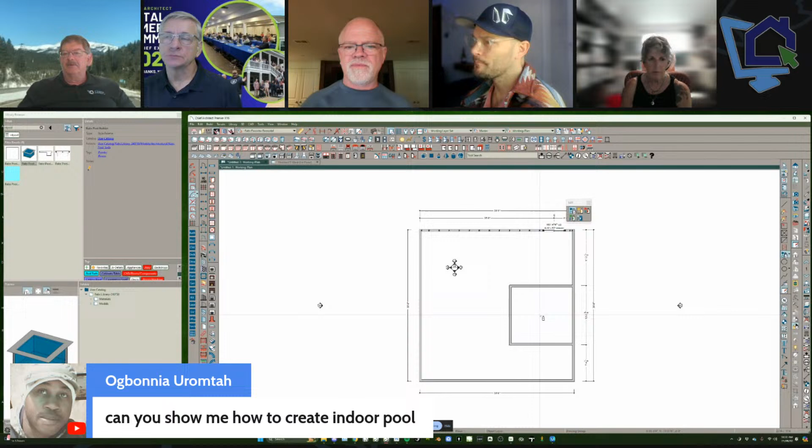We can, but if you go back a couple of months ago we did a show, it was me doing stuff about landscaping. If you watched that I think you'd get the technique — it was last month, the beginning of last month. How to do an indoor pool off of that video — there was one about landscaping, setting terrain. I did a pool in that, it would be a good technique. Here's your indoor pool, show off.

Now, does it start at 3 feet and go to 8, or is it all one level? You want a little staggered setup here? Yeah, we could do that.